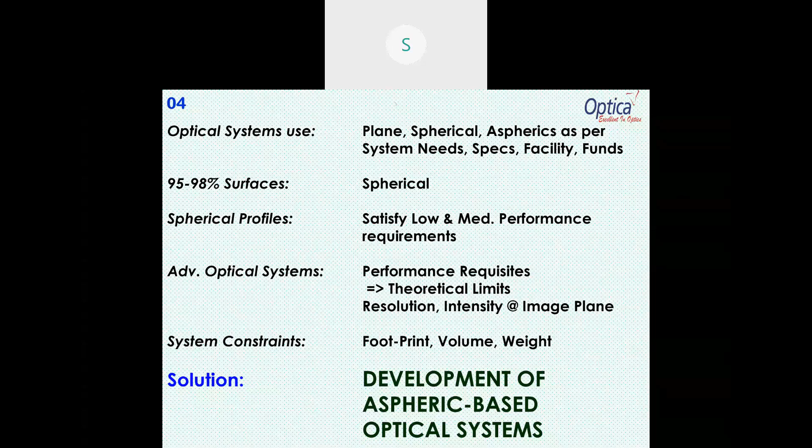So we were talking about advanced optical systems where the system needs to be compact, have less weight, occupy less footprint, and give better performance under different or difficult conditions. Then we mentioned we need to go for non-spherical surface, which is aspheric surface based optical systems.

Now, what is an aspheric system? The answer is very simple: any surface which is not spherical is aspheric. I already mentioned what is a spherical surface - it's one where the radius of curvature is the same whichever point you pick up on the aperture. When I say aspheric, that means the surface is not spherical.

So what it could be? Well, let us explore. Go to the next slide, please, Suresh.

When I say non-spherical surface, it could have any shape, but for the sake of simplicity, you cannot go to the top step of a ladder straight away - you start from the first step. So similarly, we start from rotationally symmetric surfaces. If you remember your 9th, 10th, 11th class, we studied conics - parabola, hyperbola, ellipse, etc. I'm referring to them. They are rotationally symmetric. The first class of aspheric surfaces are called rotationally symmetric conics. In this presentation we will be talking about them only, maybe at a future date we will talk about advanced surfaces also.

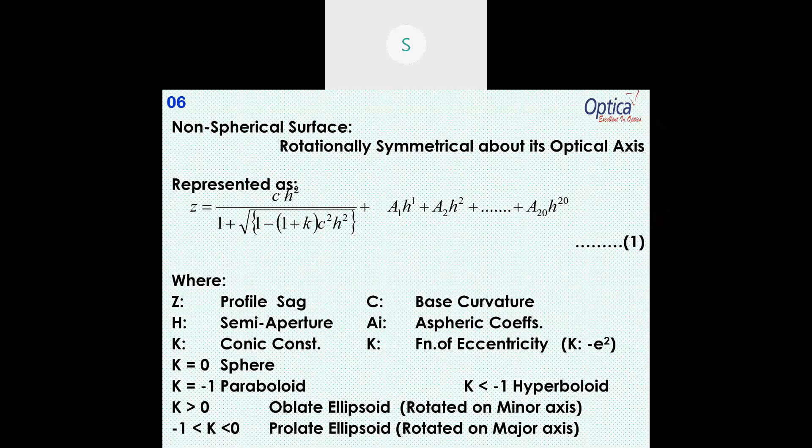Okay, can we go to the next slide, please?

Why do we need an asphere? I mentioned earlier that system performance needs to be near theoretical, meaning there should be no light loss, no energy loss. Optics people may remember the term aberration from their studies. Aberration is a defect where light incident on a surface, whether refracted through media or reflected, undergoes a transformation resulting in some loss of light or energy. Why does this happen?

The reason is simple: the basic nature of the curvature of the surface causes this. Different lens apertures focus light at different points rather than a single point. If you look at the optical axis, there's a junction where 5-6 lines cross over, so instead of focusing at one point, there's a sweeping of 5-6 points. The intensity is distributed over a limited area rather than a single point, and this distribution causes a loss of energy. We have to minimize this, though we cannot eliminate it completely - the distribution cannot be zero.

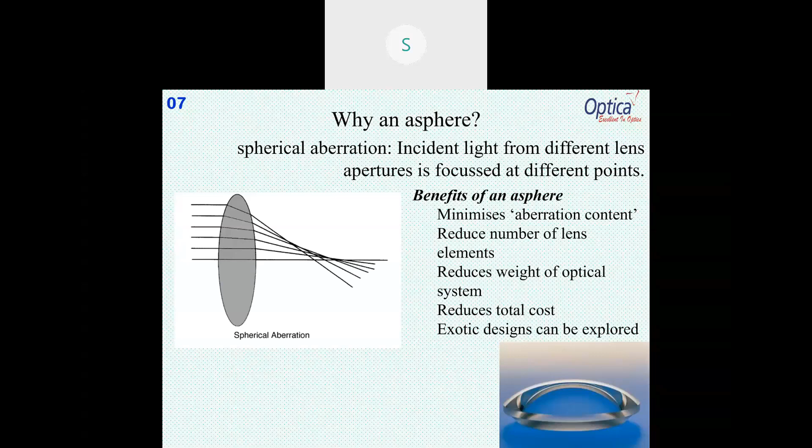So to minimize this, what do we need to do? We have to play with the shape of the surface. That playing of the shape, from a spherical surface to a non-spherical surface, is the whole game we are going to play in the next few minutes.

Now, why aspheric? I'm repeating this to reinforce the concept. Each curved surface and refractive index contribute to these aberrations, these defects of the light. To get rid of that, you play with the refractive index of the media, and if you can also play with the shape of the surface, then you can control the aberrations. That's what we are going to do.

People working in fiber optics know the term graded index - differential refractive index is called graded index, or GRIN. Some people work in that area, but I never got an opportunity to work on it, so I prefer to work in the reshaping of the optical surface, which is what I'm now explaining. This reshaping is called spherical to aspheric.

Why has this kind of reshaping suddenly taken place when it never happened before? If you look at the history of optics, the first recorded document appeared around the 10th century, and from then to today we are in the 21st century. For all these 11 centuries, people did not talk about aspherics. Why are we suddenly talking about aspherics now? Actually, we are not suddenly talking about it.

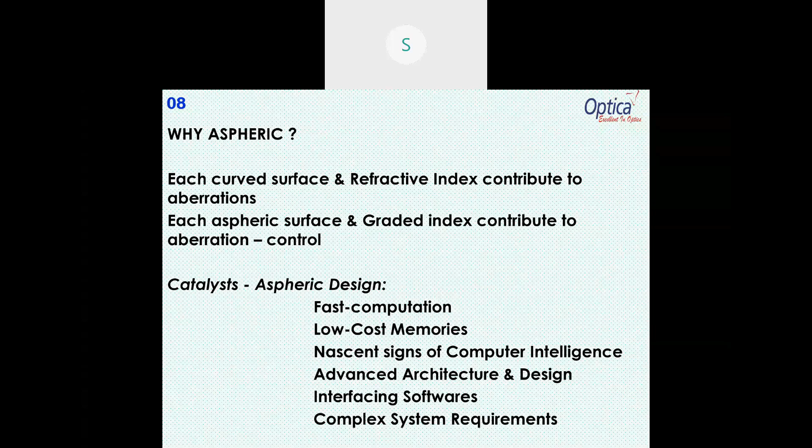Can we go to the next slide, please?

When I say advantages - number one, the designer gets additional degrees of freedom. Earlier he had only few parameters: radius of curvature, whether concave or convex, what radius - deep curvature, shallow curvature, or flat surface. He had few options besides the diameter of the lens, which tells you how much field he can cover and how much light he can gather. For a telescope, you want a larger diameter to capture light from a star many light years away. Similarly, deep or shallow surface - that's just two parameters. For a lens, the third parameter is refractive index.

By playing with the refractive index, you can bend the rays. Refractive index is the ratio of light speed in vacuum, or ether, to that in the media. When light passes through the media, it bends, and this bending can be controlled by picking a different refractive index. So there were only three parameters. Now, by reshaping the surface, you get additional degrees of freedom - that is the biggest advantage.

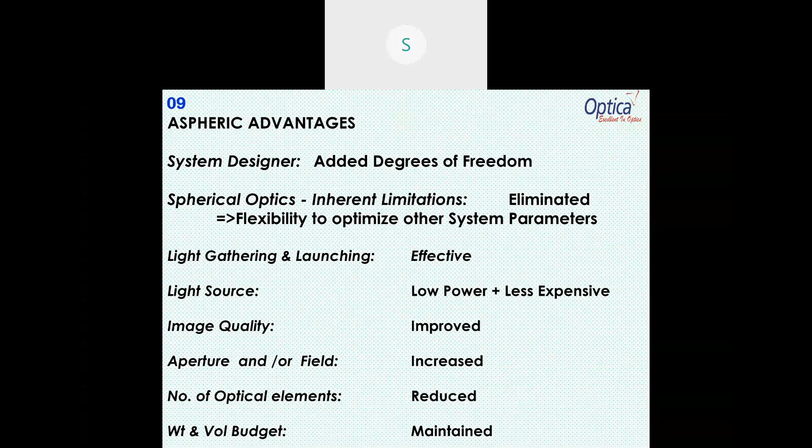So this is what happens by using a non-spherical surface - a reshaped surface giving extra degrees of freedom to the designer. If the fabricator can develop the same surface with minimal variation between what the design sheet says and the actual measurement, then the integrity of the prescription is maintained and the surface performs as intended. Now let's look at where and in what application domains aspheric surfaces are going to be used.

So can we go to the next slide, please?

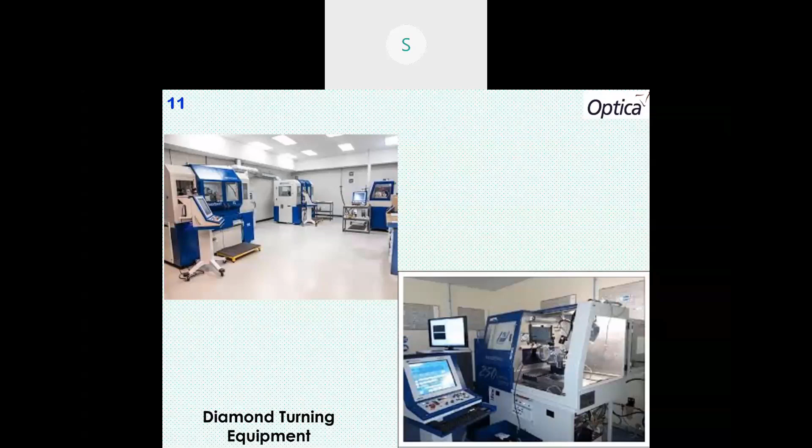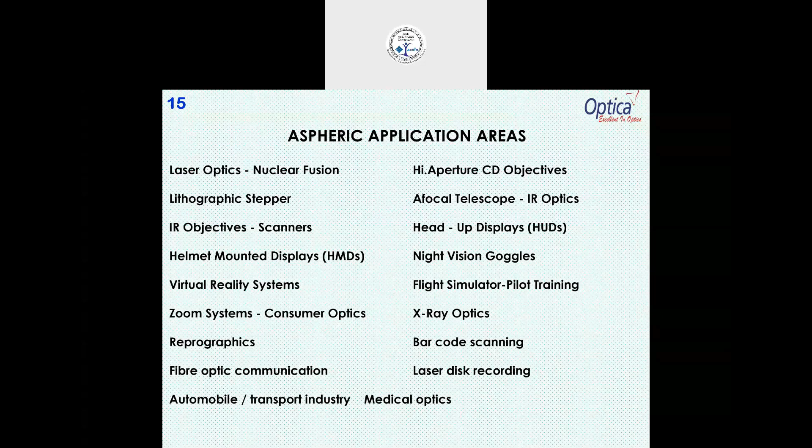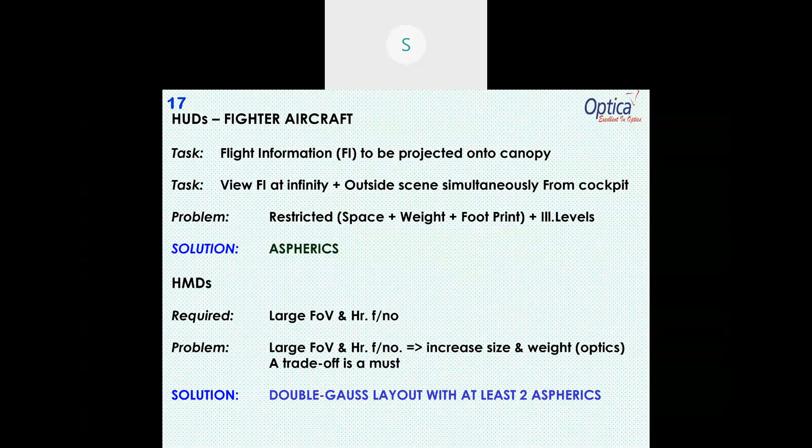This is a head-up display system, maybe a very preliminary system developed by CSIO. This was developed in 2002 or 2003, I think.

I don't exactly remember—maybe Dr. Vinod's group should be able to tell this, maybe you can interact with him. Okay, now what we are seeing here is helmet mounted display systems. I think CSIO has started working on them.

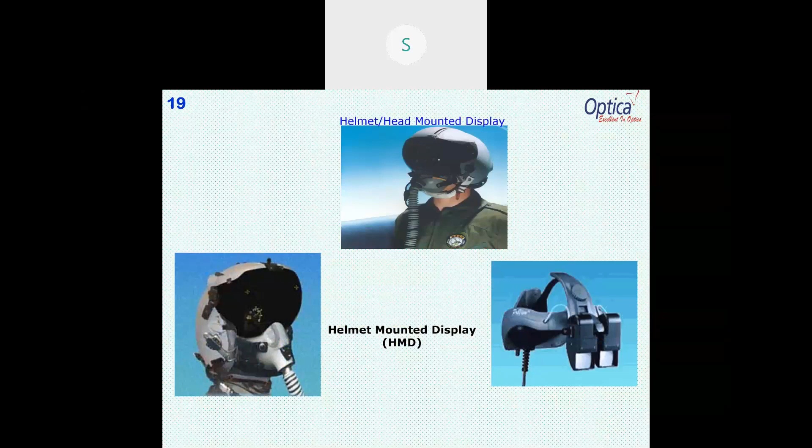One more, can you go faster? Better, more forward, yeah good. One more, binocular HMD. Yeah, now can you stop for a minute?

So many complicated things—some can be replaced by using an aspheric. That makes it lighter as well as easily compact, etc. So that's a simple example. Can we go to the next slide, please?

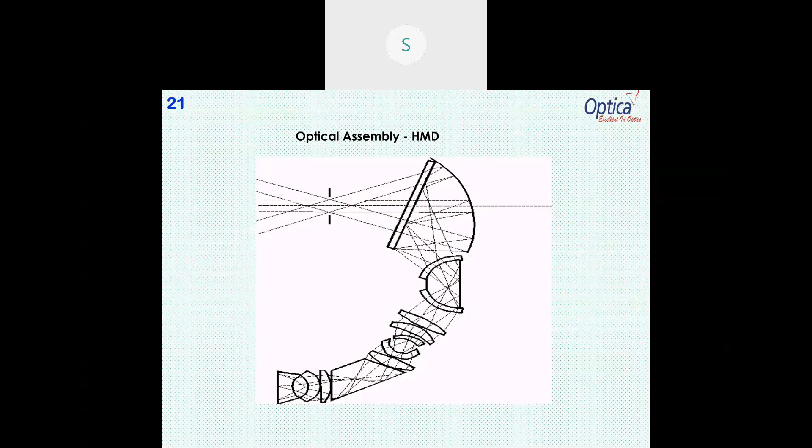This lens has both properties I mentioned for manipulating aberrations. Two ways: one is play with the shape, the second is play with the refractive index. Whosoever has created this, you call him a creator or God, has designed, developed, fabricated and assembled this aspheric lens in the human eye.

This lens is both a graded index media and also the surface is aspheric. And the asphericity is dynamic. As you zoom into a nearby object or zoom out of a far object, the shape of the surface changes. By changing the shape, your aberrations are controlled, and the power of the lens also changes, giving better focus for a far or nearby object.

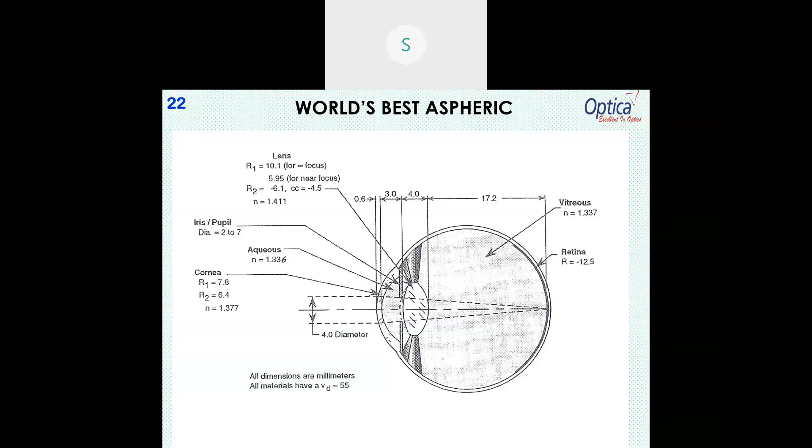When you put this implant in the body of a human being and he uses it as a joint—primarily these are all joints—these joints rub against each other. If they do not have the desired smoothness, or if their roughness is not adequately controlled, we will be into big trouble; the patient suffers pain. So it is necessary to make sure the roughness is reduced.

Now, how come I'm talking optics on one side and reduction of roughness on a medical implant on the other? The logic is very simple. If you remember a couple of slides back, I showed you diamond turning. Why did I show diamond turning? To show how to fabricate an aspheric surface. We are going to talk about that in the coming slides, so there you will appreciate this better.

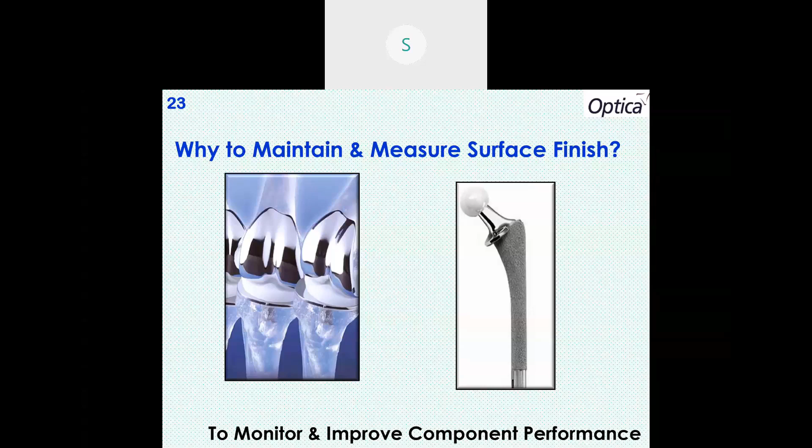Now I mentioned earlier, the first portion is design. You design first, and from the design, you go to the next stages. I already mentioned there are a few advantages.

Now, how do you decide, out of an optical system—let's say there are 20 surfaces, 20 or 10 lenses—how much you want to aspherize? Which particular surface has to be aspherized, and where do you want to do this? How do you choose that?

That's where the ingenuity, wisdom, or experience of the optical designer comes into play: how many aspheric surfaces, which particular surface, how much aspherization on a given surface, and how much aberration control is needed. Then you have to play with your tolerances, your fabrication, how you align them, how you test them, and what facilities you have at your disposal. Depending on your resources, it's like how much money you have in your wallet or credit card—depending on that, you spend.

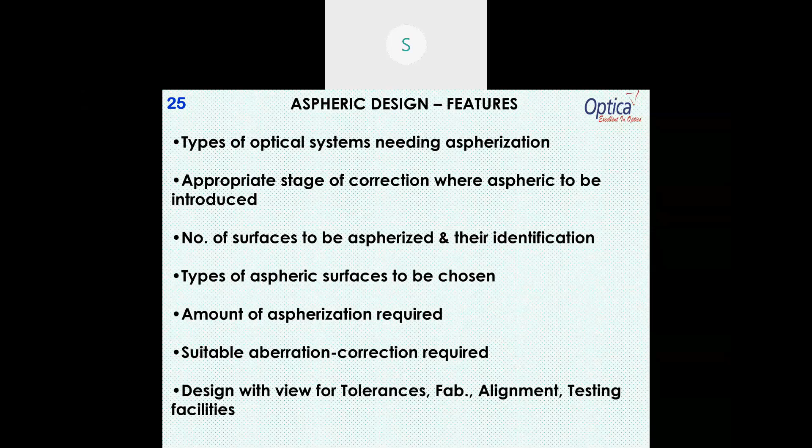Similarly, the facilities that you have would help you decide the amount of aspherization that an optical system can get. So this is primarily a policy-making area, a policy-making stage: how many, how much, and where, etc.

Once you have decided on the amount of aspherization you are going to introduce, how do you do that? Aspherization means reshaping the optical surface through material removal. In a typical optical workshop, like at CSIO, you see grinding and polishing. You can use abrasive grinding, or vacuum aspherization where you remove or deposit material through additive manufacturing, ion machining, or ion deposition. You can also deform the surface, or use compressive molding. There are many methods, but diamond turning is what we are really going to talk about in the next 10-15 minutes.

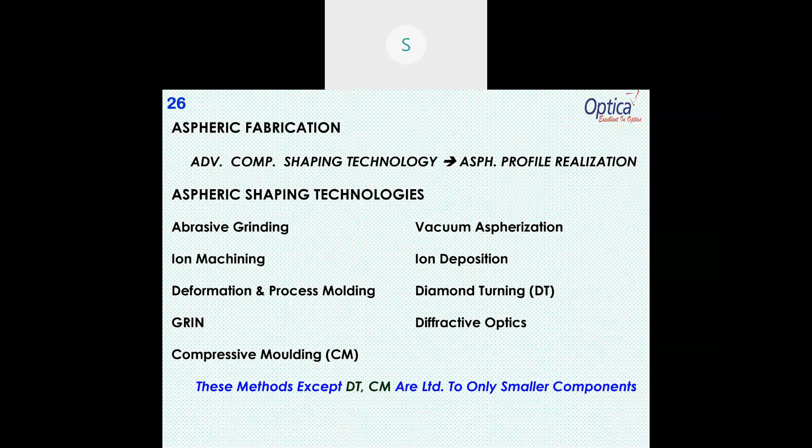What is diamond turning? Before that, how is an optical surface made conventionally? Let's go to the next slide, number 28.

How is an optical surface made in a conventional method? Let's talk of a lens. You take a glass blank, rough shape it using a tool, and leave a stock of about 1 millimeter extra, or maybe 0.5 depending on the skills of your workshop people. Then you generate the optical shape - the radius of curvature, whether positive or negative, convex or concave, and the thickness.

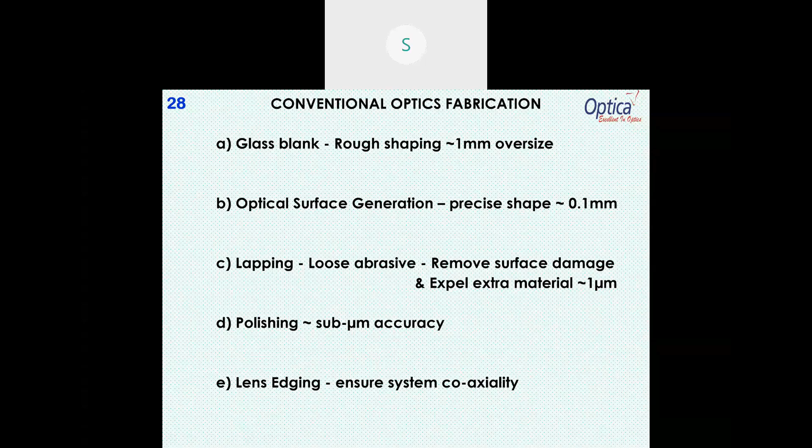Let's go back to slide 27. In the previous slide, number 28, I was talking about who does all this - a person or a machine, primarily the process. Now, how do you ensure the process is error-free? That's where CCOM, computer controlled optical manufacturing technology, comes into play. You control the grinding, the polishing, and build in a feedback mechanism so the curvature is maintained, the aperture is maintained, and the surface quality is also maintained.

The basic problem in aspheric surface generation is the difference between aspheric and spherical surfaces. The radius of curvature is continuously changing from the vertex, point by point, all the way to the edge of the surface. This means you have to create a surface where the radius is constantly changing. How can you depend on human skill here? Is there any mechanism to develop this kind of surface? No tools are available - the normal traditional tools are all spherical tools, so traditional optical workshop techniques do not serve the purpose here.

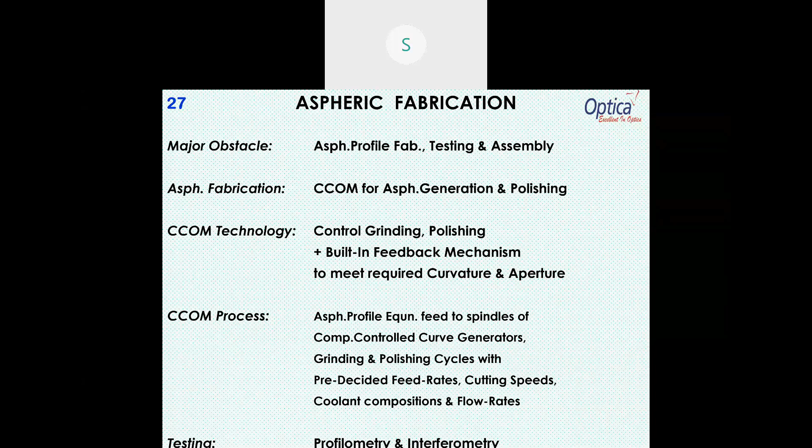So we are talking of a diamond turning machine. What is a diamond turning machine? It is a perfect machine, tool, and job or workpiece combination. The machine has ultra high precision controller accuracy. The tool is a diamond tool, that's why we call it diamond turning - the tool is practically a diamond tip. The workpiece is the optical surface we are going to generate. When these three work in unison, and when you control the process, the operational conditions, and the machining conditions with proper feedback mechanism, you generate the optical surface of the highest quality.

Somebody asked me a long time back when I was at CSIO - you are using a CNC lathe machine and you say this is an optical instrument, how is that possible? The answer is simple: I'm using an ultra high precision mechanical equipment to generate an optical quality surface. When I say optical quality, the surface waviness - mechanical engineering people understand this as waviness, physics people call it figure error.

In optics, we measure everything in terms of wavelength. The visible wavelength range is 0.4 to 0.7. So when I say wavelength, the fraction of a wavelength is my error. We'll come to that a little later.

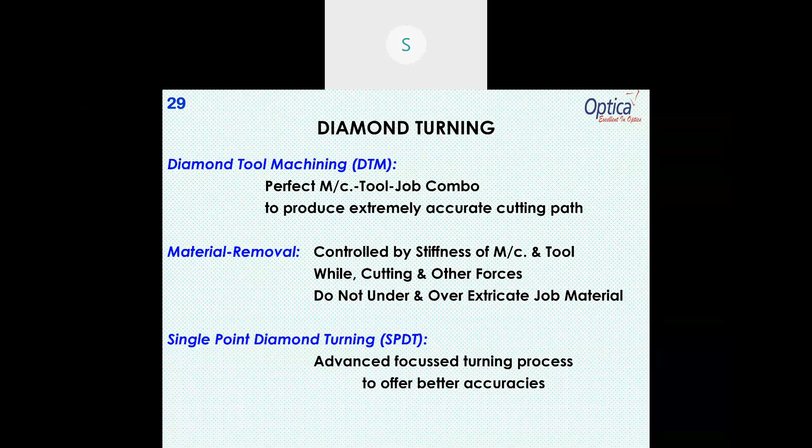Okay, how do you do this? There are stages. You prepare the job to approximately 100 microns or 0.1 millimeter and mount it on a vacuum chuck as I mentioned. Then you select a proper tool - like a painter selects a proper brush with the right geometry and shape - you select the tool with the right geometry and determine how to mount it. Then TPG means tool path generation - you have to generate a proper tool path. It's like going from CSIO to Sector 17 or Elante Mall - you have a path, you have to chalk the path, and if you're asking your machine to take you there, you have to give this path to your machine.

Similarly, how the machine is going to generate this surface, you have to specify how the tool is traveling on your job. That is called tool path generation. Then diamond turning takes place, the machining takes place. Then you take the metal component out, clean it up, verify. In other words, you check the surface for the prescription, whether the radii are okay, whether the K number is properly done, the figure error, and how is the roughness. So these are the stages.

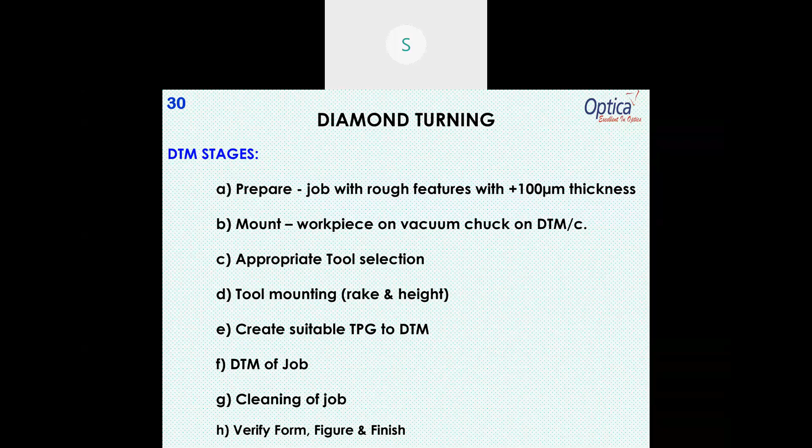We'll go a little faster from here. I'll not get into many details.

So this is how we generate an aspheric surface. Diamond turning is primarily a displacement controlled process, so this force is distributed at one point, whereas in grinding process, force is equally distributed over a large domain, a large area. There you actually fracture the top layer of the surface, and you apply pressure, creating a network of cracks, and repeated application of pressure force removes the top layer material. Here, line by line, you are actually walking, or taking a pen on paper, or taking a stylus on the surface. You are taking the tool, removing the material by shearing it. So this is force distribution over a small area.

And how do you do that? There are 3-4 parameters in our hand. One is the feed, another is the speed, that is the spindle speed, and the depth of cut. One point we forgot to add is the material. The motion of the tool depends on the material on which it is actually working. Simple example: if I ask you to walk on a highway, or on a cobbled street, or on a place where there is no road, your path is disturbed, your way of walking will be disturbed. Similarly, the tool's geometry as well as the material being machined or processed would decide the surface quality that comes at the end.

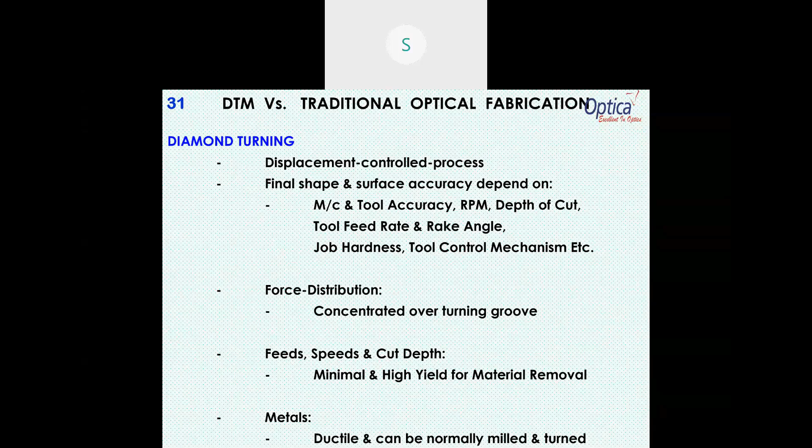We mentioned about the grinding process, the network of fractures, etc. I think we can skip this and go to the next one.

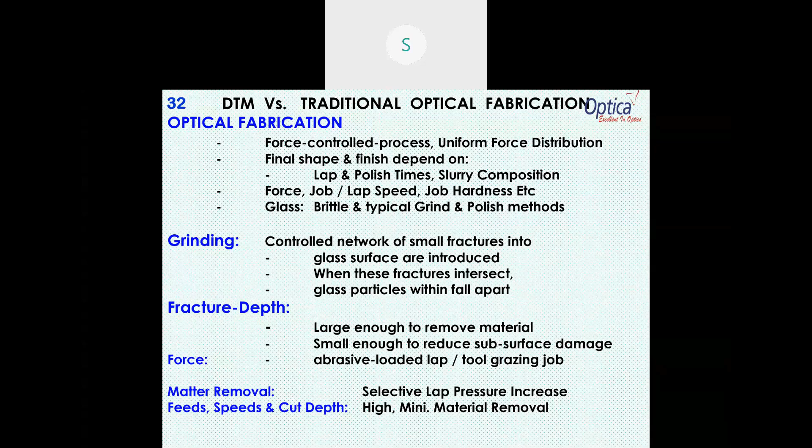Now I was mentioning about how we test the surface, whether it is meeting the required specifications or not. What we do is actually we measure the inaccuracy, we don't measure the accuracy. In normal conventional optical fabrication, you use a test plate, Newton rings, and an interferometer. For the roughness, you have the concept of how many scratches are there, what is the depth and width of the scratch, the scratch and dig concept.

Whereas in diamond turning, the profile accuracy, or inaccuracy, is measured using a profilometer, a scanner which goes over the surface, scans it, and measures the depth of the surface, which we call the sag or size, and it measures the waviness of the surface. Surface finish is also done by the same scan. You have to write the program. If you remember the equation I was talking about, the same equation is used by the designer to design the surface. We feed the same equation to the fabricator or diamond turning person through CNC programming to generate the surface. And here also, we use the same equation to test whether the surface is made as desired or not.

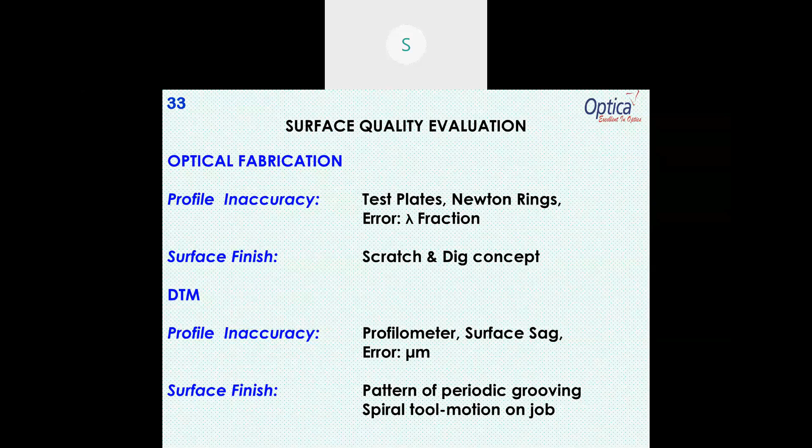Okay. As I mentioned, there are many methods of generating this kind of surface. Why is diamond turning selected? Because diamond turning is the most preferred method. The lathe machine or CNC machine, the machining, is one issue - it has to be ultra high precision. As I mentioned, we are talking of controller accuracy of a few nanometers, 8 to 9 nanometers, and we are talking of a tool which is hard yet very sharp with minimal tool wear. These issues are very important. If the tool wear is high, it's like a chalk piece which, during writing on the board, erodes and wears off - before you finish a sentence, you have to change your chalk. I'm talking of old days. So similarly, you have to be very sure of the wear of the tool that you are using.

That's the reason why diamond has been selected, because diamond is the hardest material available to mankind. So diamond has been selected as a tool, and an ultra high precision lathe is selected for machining. Instead of normal CNC machines or any other material removal methods, diamond turning is selected to generate a surface which is aspheric of optical quality. When I say optical quality, the waviness or the peak to valley errors are a fraction of optical wavelength. And optical wavelength, mind you, we are talking of 0.4 micron to 0.7 micron, the visible range. That is the reason why we go for diamond turning.

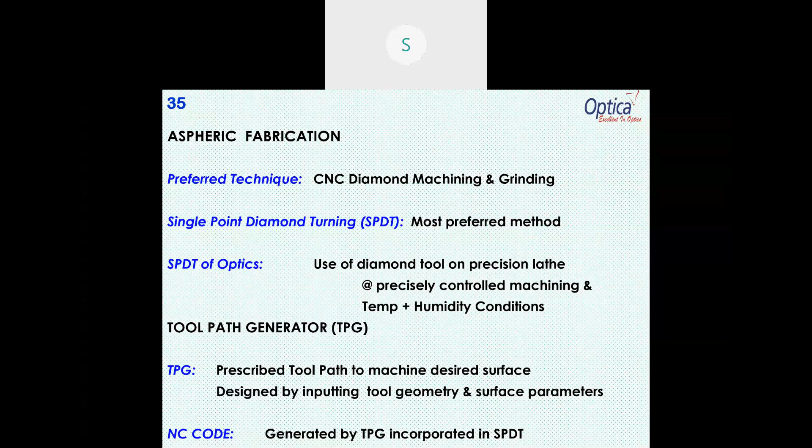I was mentioning about machining conditions. Needless to say, the machine has to be stable - no vibrations, no shocks, also no thermal shocks. Why we should not have thermal shocks: most of the machine is metal. Coefficient of linear expansion of any metal varies between 7 micron to 14 micron per meter per degree centigrade. And the machine bed is generally about 250 mm, that is 1/4 of a meter. So if there is a 1 degree centigrade change in the temperature around the system, you are actually causing, say, 1.75 microns to 3.5 microns error in the movement of the metal slide.

Just think about it. The movement itself is error - there is an error of, let us say, 1.75 micron. Then what will happen to the surface that is being processed? Because I was mentioning 0.4 to 0.7 is my wavelength, and the surface quality needs to be a fraction of that wavelength, that is, we are talking about, let's say, 0.15 micron. How can I afford to have thermal conditions affect my surface? That's the reason why we say the ambient temperature has to be maintained within plus or minus a tight range. Relative humidity is also controlled. Cleanliness should also be high, and the machine has to be really good.

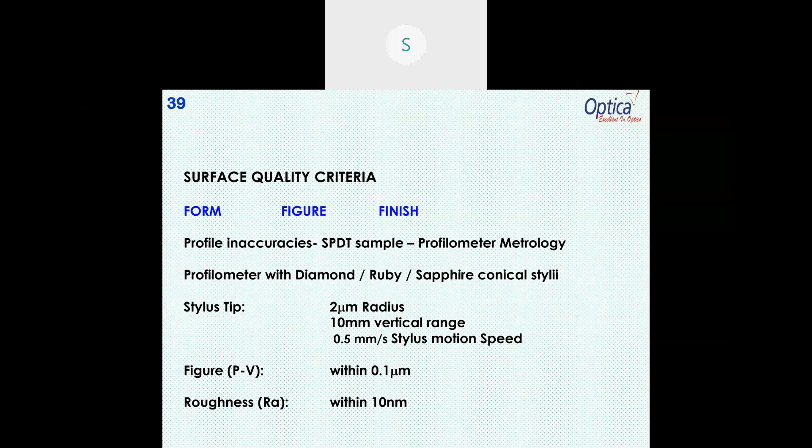No, these are the ideal conditions. So far I have talked about that. Now let's talk about what are the problems in developing an aspheric surface using diamond turning. There are many issues, we'll go one by one. We'll take within 10-15 minutes.

Another 5-10 minutes rather. So we know that aspheric fabrication using diamond turning is a vibration-free diamond tool machining. Material removal is minimal, consistent surface quality, surface characterization - all these things are welcome. They look pretty good when you hear these things, but in reality, what will happen?

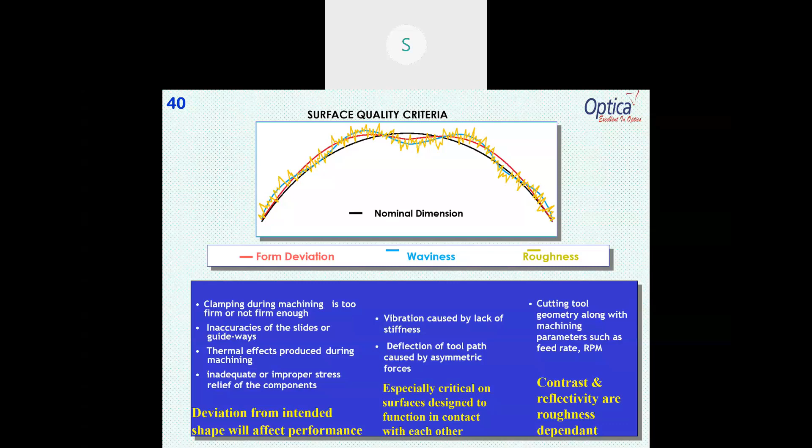What are the errors? Somewhere we come across issues. Now, these are the issues.

The machine is in perpetual motion, the spindle rotating at 3,000 or 4,000 revolutions per minute. So there are dynamic effects taking place. Maybe loading is not okay, or the machine job is not properly put, or the balance of the machine is not okay, or maybe there is some resonance in the machine. All these things will contribute to errors in form, figure, and finish. That's what we have to worry about.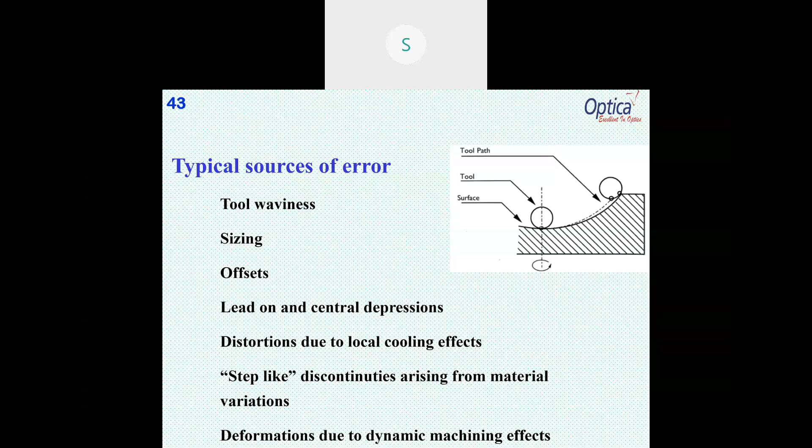What will happen when these things happen? All those things I mentioned - your tool has worn out, dynamic machining issues, thermal effects - all of these are causing issues. What will happen? Let's see.

Then tolerances are violated. The surface figure and roughness tolerance are violated. So when one particular surface gets spoiled, when it violates this prescription, the errors will contribute to the overall performance.

Something like this: let's say you have a class of 10 students in class 10. One fellow has failed, so the overall percentage comes down. Everybody is scoring 90, 95, but this one is like me, scoring only 42, 43. Just because of this one student, the whole percentage comes down. Similarly, one surface, because of its errors during fabrication, will spoil the performance of the whole optical system.

So they contribute when the design goals fail. Just imagine a soldier using your night vision system - his life depends on the fabrication and design of what he is carrying. If one surface is not made properly, instead of shooting an enemy, he may shoot our own soldier. These things will happen.

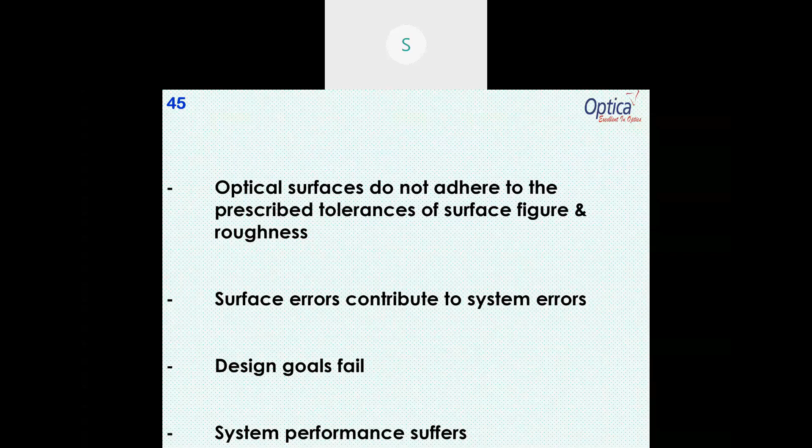How to resolve these issues? Very simple - you have to play with the parameters. I want to share that I'm not an engineer, I was not trained as an engineer. I'm a science man - MSc Physics was my introduction, then I did my MTech in optics, and then PhD, that too in design, not fabrication. But this fascinated me - diamond turning fascinated me when I went to USA on the Indo-US Science and Technology Fellowship. There we went through this and learned.

Now this flowchart shows how to resolve the errors. You start with the machine, prepare a component, measure the surface, check whether it is okay or not. If it is not okay, then you change your tool path, the way your tool is moving, and then go back. This error correction cycle takes place.

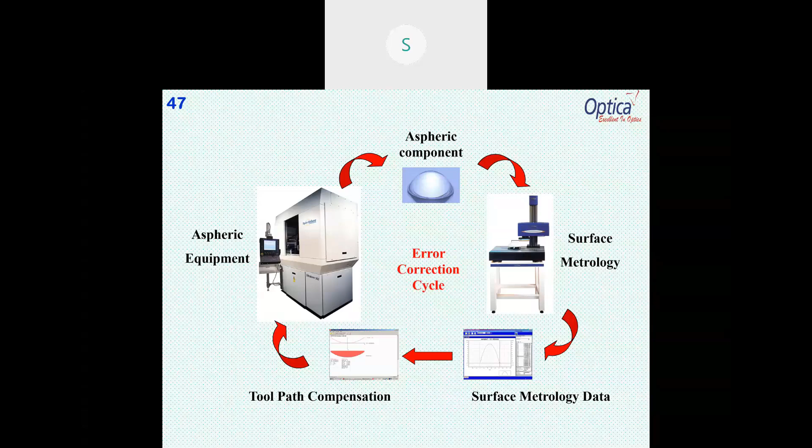So how do we proceed? If it is so simple, then what are the challenges? Let's go through this a little faster - I think I am overshooting the time. This portion is about deterministic precision machining. When I say deterministic, what is deterministic?

Deterministic system means randomness is minimized. A deterministic model will always give you the same output from a given starting condition. It is like this: if you start from sector 3 and need to go to sector 17, under normal conditions it will take 20 minutes. So under the same conditions, you should always take only 20 minutes. If you take 25 minutes or 14 minutes, that means the processing of this data is not properly learned - the system is not deterministic. Deterministic means randomness is reduced, and that's what we apply in diamond turning.

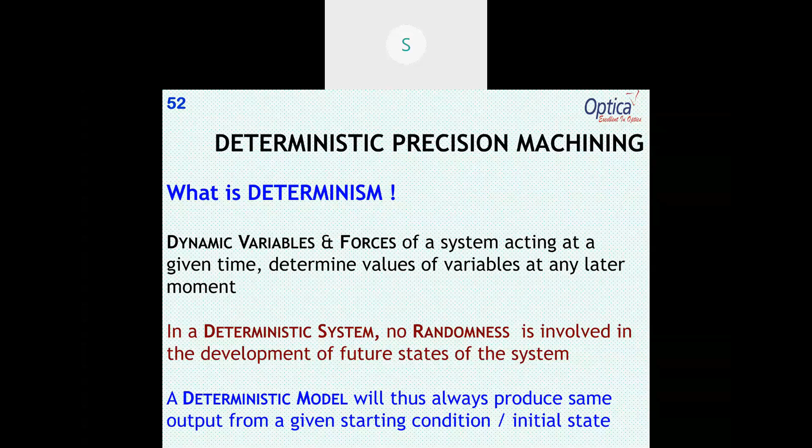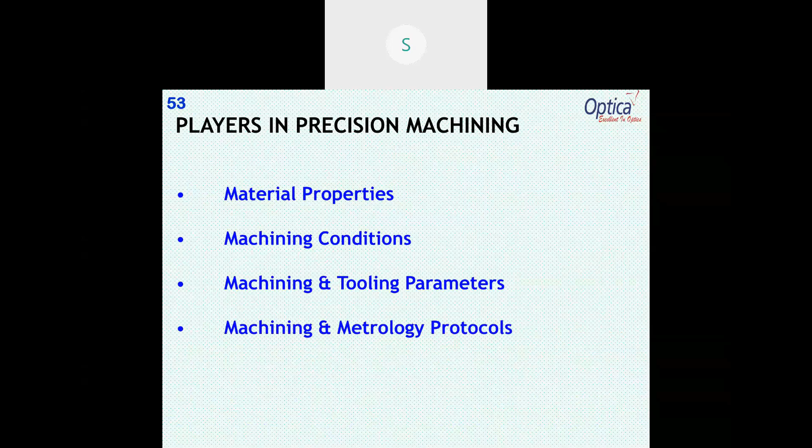What are the parameters which create randomness? There are four: material, machining condition, machining and tooling parameters, and machining and metrology protocols. These are the sources of violations, or sources of not being able to meet the end results. Can we go faster?

Yeah, material. First thing is material. These are the parameters: hardness, ductility, brittleness, thermal property, whether it is crystalline, amorphous, etc. These will decide its behavior. But material is also not decided by you, the machinist, but by the designer.

He decides, I need this particular material for these reasons. Whether it's normal aluminum needed, or super fine aluminum needed, or copper, or maybe he wanted a brass material. This is designed by him, not by you. Similarly, if he wanted to go for an IR component, should I use germanium, or silicon, or some other material? This is as per the prescription.

It is something like this. You have a brother who is an intelligent fellow, and you have another brother like me who is a useless fellow. Now, the intelligent fellow will anyway score marks. The question is, how do you make a useless fellow score more marks? That's where your skills come into play, or you have to manage the intelligence in such a way that the targets are achieved.

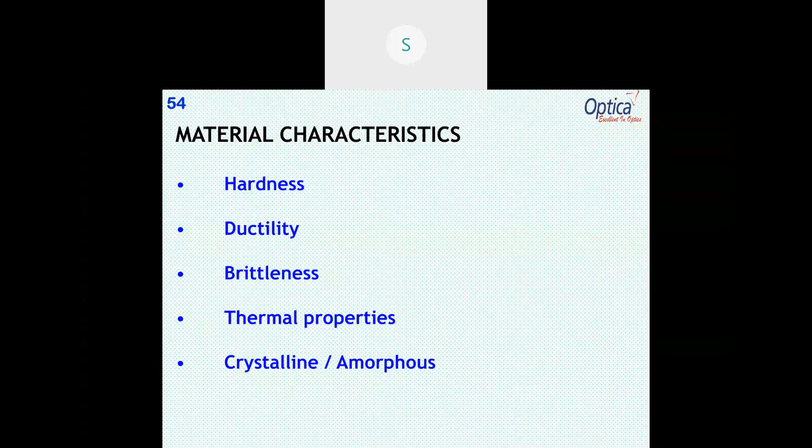Next one please. Machining conditions. How do you control them? What are the parameters? The coolant is used.

Whether the coolant is properly selected or not, properly placed or not, whether the coolant is actually cooling the job or not, or it's cooling somewhere else. It should not be hitting one place while aiming at another. It should be exactly where it should be.

Next one is temperature. The ambient temperature is fluctuating. So obviously, you remember I was talking of thermal coefficient of linear expansion. Those things should not come in.

Similarly, the chips are coming in during machining. The chips are either properly thrown out or coming in between the tool and the job. And similarly, what is the humidity? And what about the tool wear? If the tool is worn out during machining, obviously you don't get the surface quality as you want.

Similarly, the last one, what is the type of programming? What is the way that the tool is moving? So this also causes effects. Next one please.

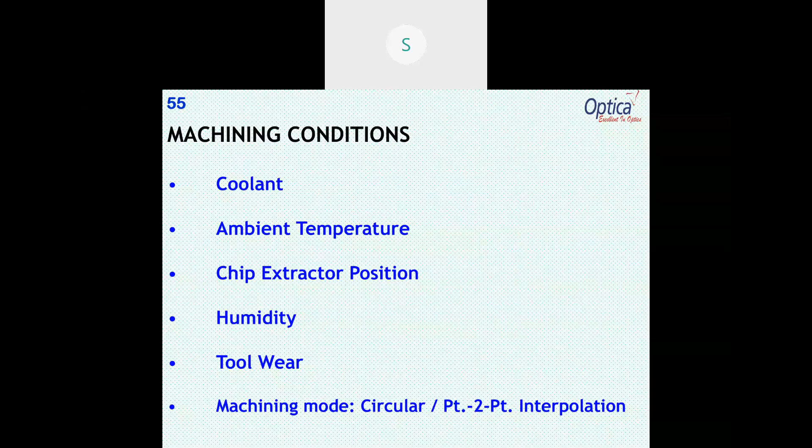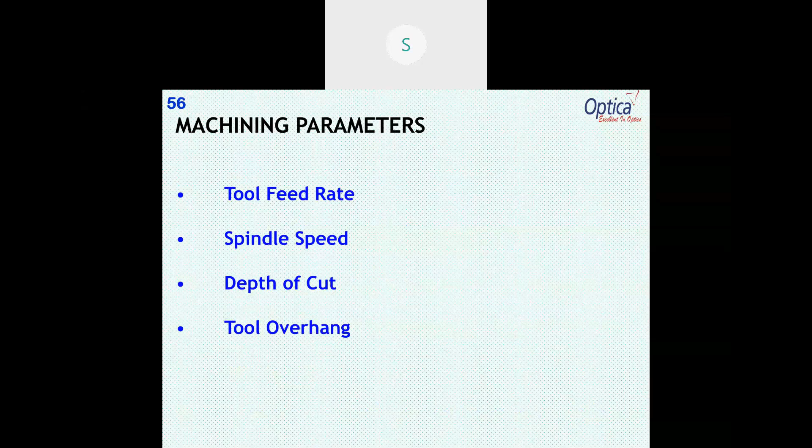Then machining parameters also. I mentioned there are major parameters: tool feed rate, spindle speed, depth of cut, and then tool overhang. All these 4 parameters. Tool overhang is how the tool is being held, far or near. So these, I think from here we'll go a little faster.

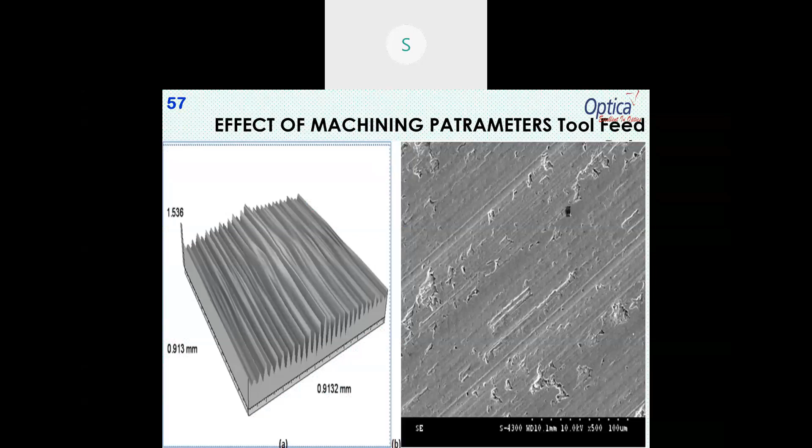The next parameter tells you about tool feed. What happens when you properly or improperly select a tool? Okay, then next one. Here is your placement of the job. You see the lines, whether it is properly done, or tool overhang, etc.

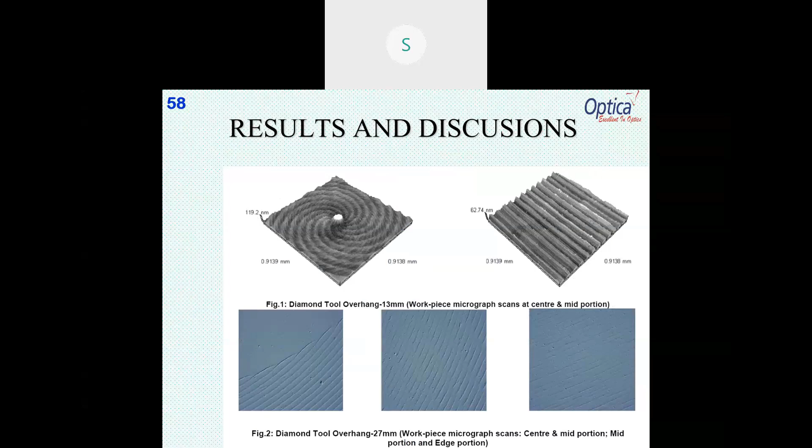Yeah, these studies, my dear friends, we have done all these studies. Whatever you are seeing are done at CSIO. So I owe all these slides to CSIO. All my colleagues there have done this, particularly Mr. Vinod Mishra.

So here you see the parameters: tool feed rate, depth of cut, spindle speed, and their effect on the surface quality in terms of roughness as well as in PT. RA corresponds to roughness, PT corresponds to the figure error. Next one please.

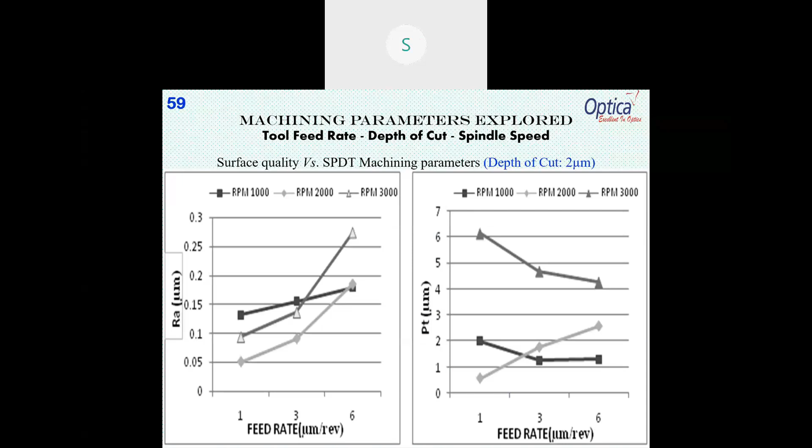Here we are playing with different depths of cut. Next one please. Yeah, it is the highest depth of cut. What will happen at the highest depth of cut? The surface quality becomes bad, poor.

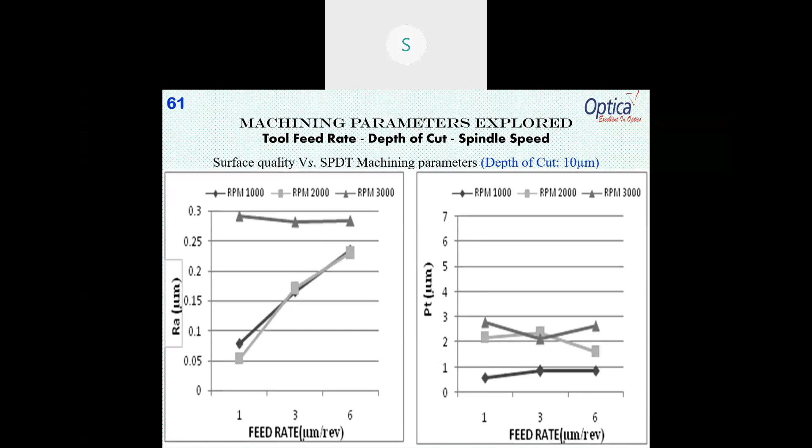So then, tool feed rate, how it is affecting. We have done all these studies on different materials at CSIO. You can go to the next slides a little faster.

Yes, the next one. You can actually see here, if the spindle speed is not properly selected, then we get something called a star picture. And then what you are seeing is the tool is not properly held. That is called tool overhang, if the tool is too closely held or too far away held, either way.

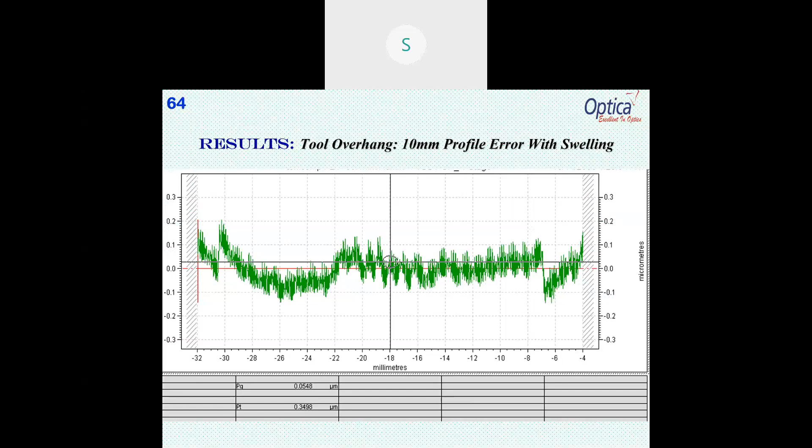Next one, you can see the effect of tool overhang on the surface quality in terms of waviness, as well as next one. Yeah, this is the roughness, if it is properly held or not. So these studies we have conducted.

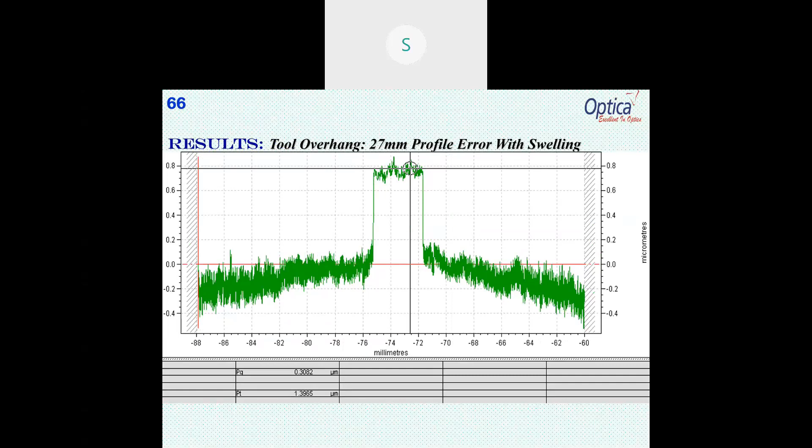Next one, here it is an improperly held tool, very bad holding of the tool. It's something like, how do you hold your pen while you are writing? Is it that you put the nib, that writing area, very close to your fingers or very far? That is what I mean by saying overhang.

Next one please. Yeah, this is for the roughness, tool overhang with the roughness. The next two slides. Next one please.

This slide represents work that took us nearly 3.5 months. We are showing different roughnesses under different tool feed rates, depths of cut, and spindle speeds. Which one, for a given tool overhang, is the best? How do you hold the tool? This study was part of a couple of MTech students' thesis.

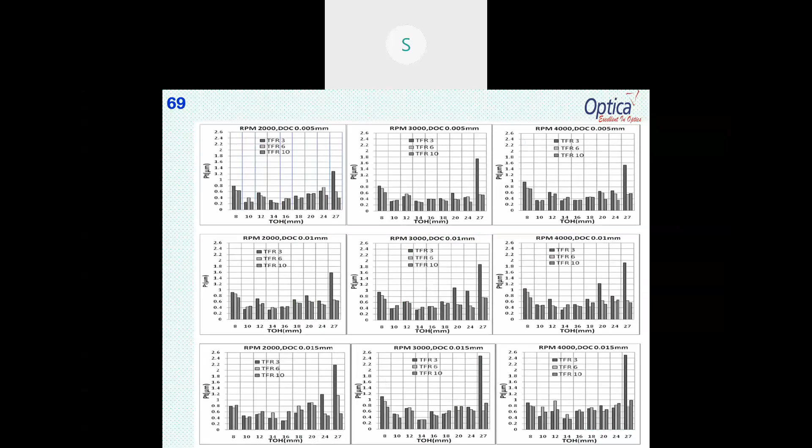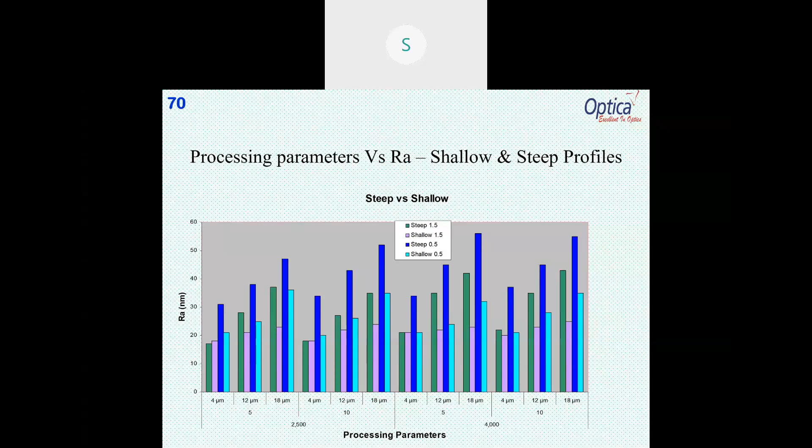We have done this study for both roughness and waviness, and also examined shallow versus steep surfaces to see what happens in terms of roughness. There are many such studies we conducted.

We also did an exhaustive study on diamond tool wear, taking two materials, silicon and polymethyl methacrylate, that is acrylic. Here is a typical tool, how it looks. On the right is a photograph taken by one of my students at CSIO, showing the octahedral structure of the diamond crystal.

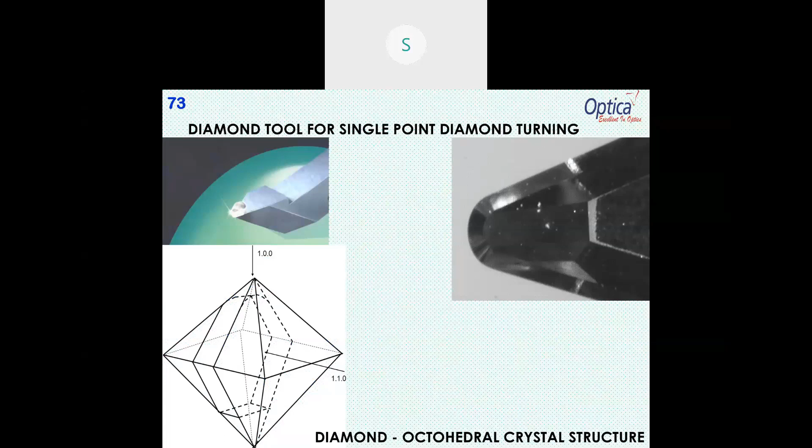These are the parameters important for selecting a proper tool geometry: rake angle, conical angle, nose radius, cutting arc, offset angle. If anyone is more interested, my contact details are provided, you are welcome to contact me. I won't get into details here since it's an exhaustive study we did on tool geometry effects, particularly tool wear.

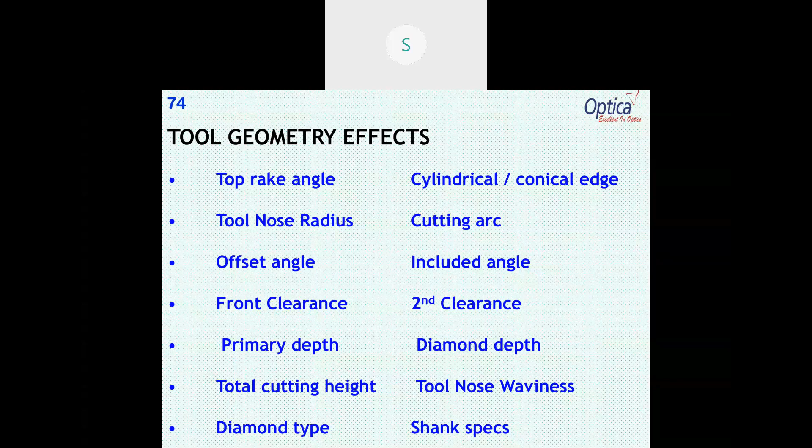As I mentioned, the edge is supposed to have ideal circularity, if that ever happens. When there is a violation or transgression, controlled versus uncontrolled waviness results, and the surface suffers as shown here.

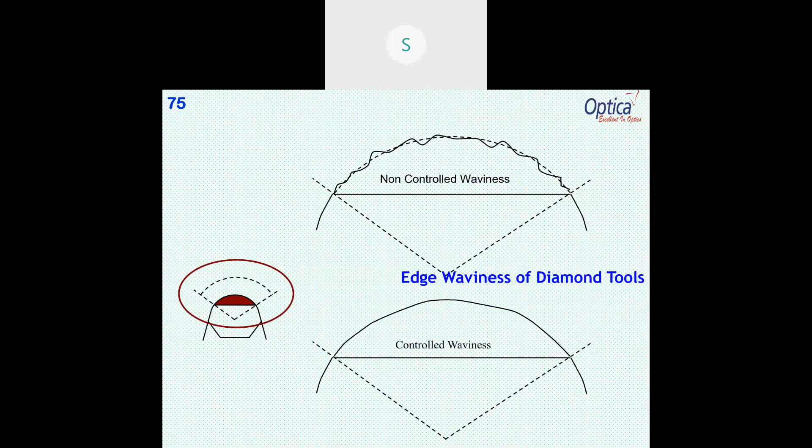Apart from that, if the tool is worn out more than it should be, what happens? The inlaid photograph and schematic show this, because practically the tool tip replicates onto the job. If the tool tip is not okay, the job will also not be okay.

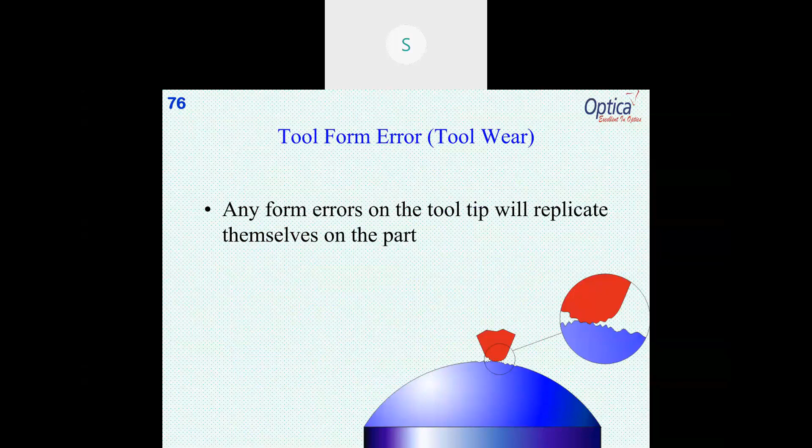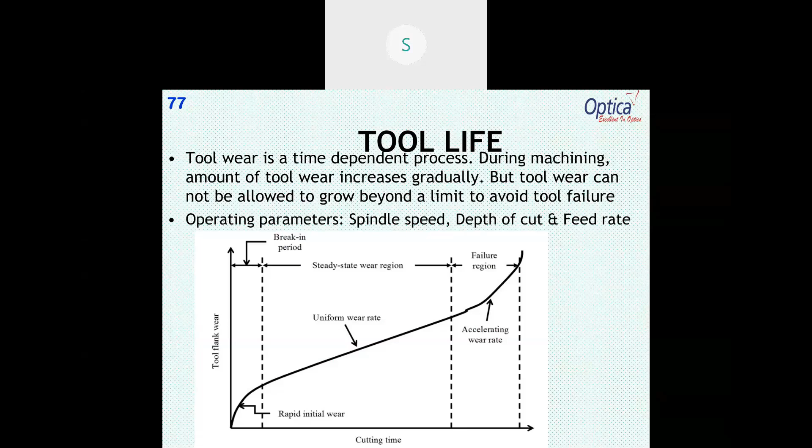Why do we measure tool wear through metrology? It's very important because these tools are very expensive. A normal CNC lathe tool may cost 50 to 150 rupees, at most 1500 rupees, whereas a diamond tool starts from 20,000 rupees and goes up to 1.4 lakhs for just one tool. When the tool wears out, I have to change it, which means more money, making the component very expensive. To control tooling costs, we need to study the wear characteristics.

In diamond tool metrology, before CSIO attempted this, nobody had done it. We reviewed a lot of literature; the way it was understood was different. We approached it in a radically different way.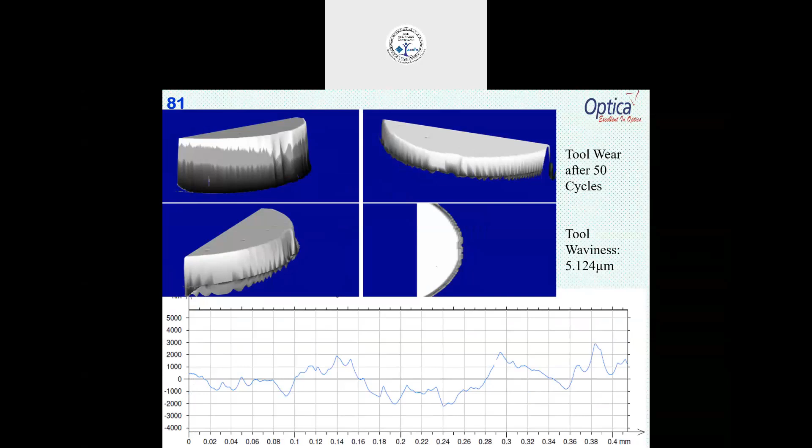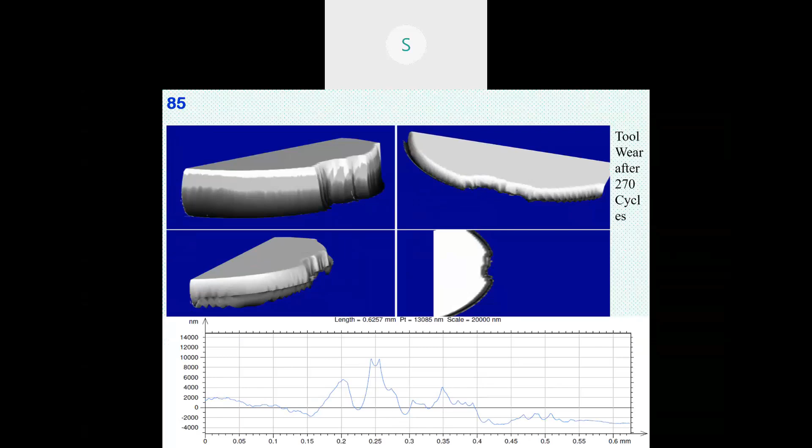We conducted typical machining cycles starting from 50, 100, 150, with different materials each time. Each cycle shows, through photographs, how much D-shaping of the tool occurred, up to 270 cycles. This study was again done by a couple of MTech students over 4 to 5 months, day in and day out, across different materials. We took pictures of the tool and carried out very critical design of experiments, conducting a lot of studies there.

So what you see here is just the replication of normal tool wear as is for the standard textbooks. Now you can say, what new have you done here? We have done all this with a diamond tool, which was never reported before. So we got a few publications based on this study also.

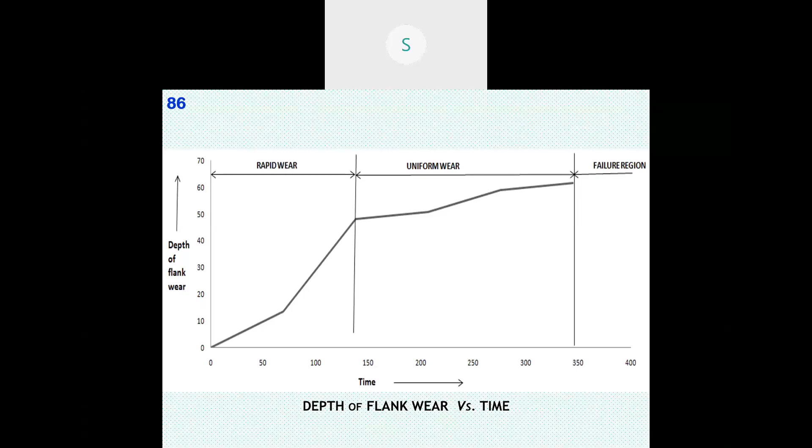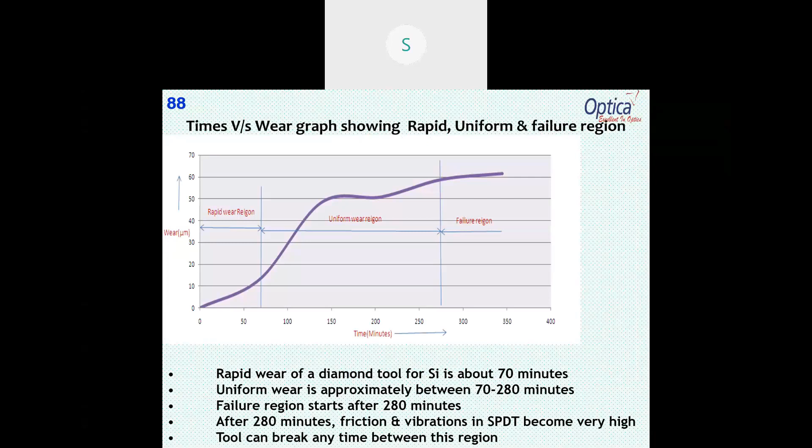Can we go a little faster now? Next, yeah, this is again on a different wear we are talking about. Yes, we have analyzed this in terms of the normal tools also.

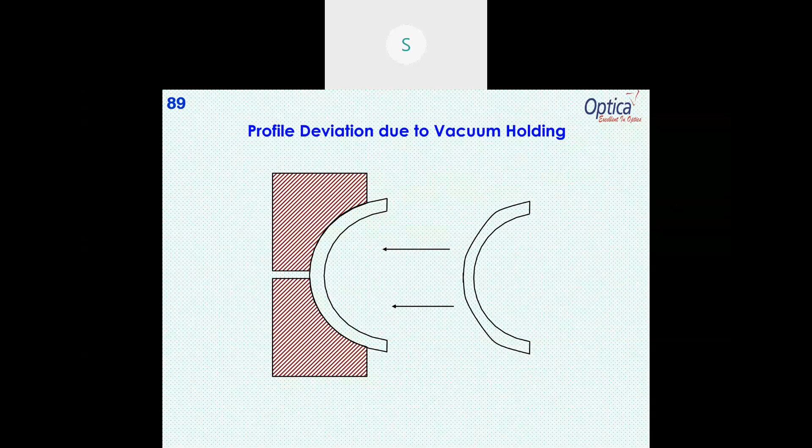So here we are talking of a different thing. If you remember, I've told you how to hold the job. If you hold the job tight or loose, what would happen? You actually are bending the job. You bend the job, whether the hysteresis properties will allow the job to come back to its original shape, it will spring back or not. If some error is left behind, that means you have damaged the component. So the holding of the job is very important. One of my students at CSIO has done some work on this particular aspect. And these 3-4 slides, next one please.

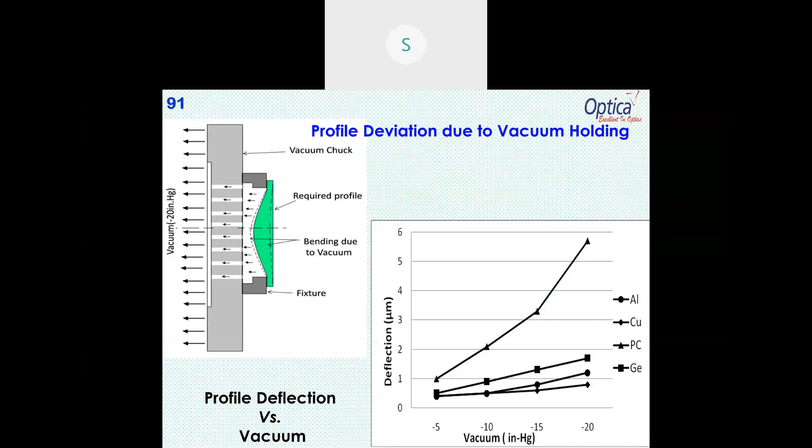Yeah, we have done this. Four of my students have worked on how the thermal effects during diamond turning would affect the profile error in diamond turning, spread over 3-4 years. Boys have done this at CSIO, MTech students, and again these AcSIR students. We have designed a series of experiments and a mathematical model has been created, and then we did all that. So what I want to share with you is that a lot of case studies have been conducted for different aspects of diamond turning using different materials.

And I have to accept, I have to submit here, most of the work, my dear friends, was done by you people or your predecessors, the students. My participation was giving an idea, follow up, design of the experiment. Actual work, actual running the show was done by my students, your predecessors at CSIR, CSIO. So all credit to them. I mean, my contribution is only idea, assimilation, analysis, and conclusion. Whereas the actual grunt work, as they say, cutting the grass, was all done by the students. So this is what we did there.

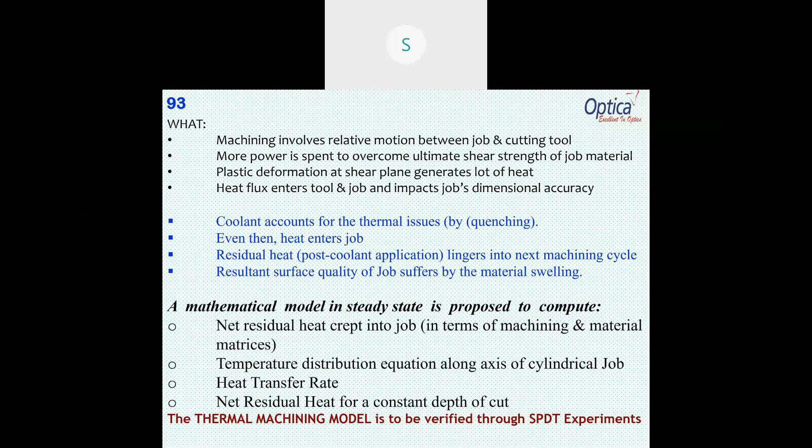Now let me go to the next one please. Yeah, here I'll just spend 2 minutes. Now after your AcSIR career, after the degree that you take, where are you going to go? You go to academics to teach, you go to industry, or you become scientists, or you go abroad, you do whatever you want. Whether you are going to work in the field of science and technology or you are going to become managers, I have no idea. Future will unveil everything in time.

And one thing above is opportunity utilization. See, COVID-19 is going to teach us many things. New business models are coming, new living styles are going to emerge. Now, whatever opportunity comes your way, grab it with both hands. How fast, how quick, how effectively.

Then all your resource management. It is one thing to have resources and another thing to manage them optimally. What is the manpower at the operational level as well as the intellectual level? You can't have everybody doing everything, right? How are you going to deal with the people? People with intellect, they come with egos also, complexities of behavior. How do you deal with that? Because end of the day, how much money you made, how many projects you have completed, these are the issues that will come into play.

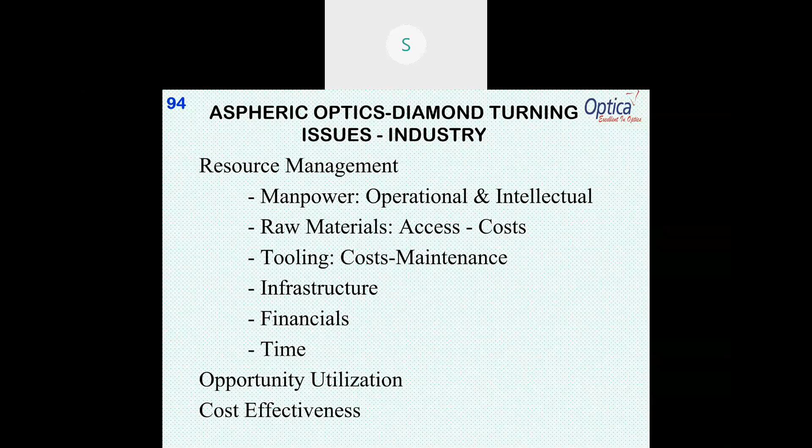It's very important. So, a couple of slides more and we're through. We need to develop micro machining models. All the work that I presented is based on fundamental principles leading to last conclusions - some mathematics, some modeling, some gut feelings, some assumptions, some literature survey, like that. And tool wear dynamics, materials, subsurface damage - one of my students at CSIO, Rohit Sharma, just completed his PhD and did extensive work on subsurface damage. And the heat - this is a very big issue in diamond turning of a component - and vibration analysis. So microfabrication and nano characterization require a lot of theoretical studies, which should help the practical aspects of this.

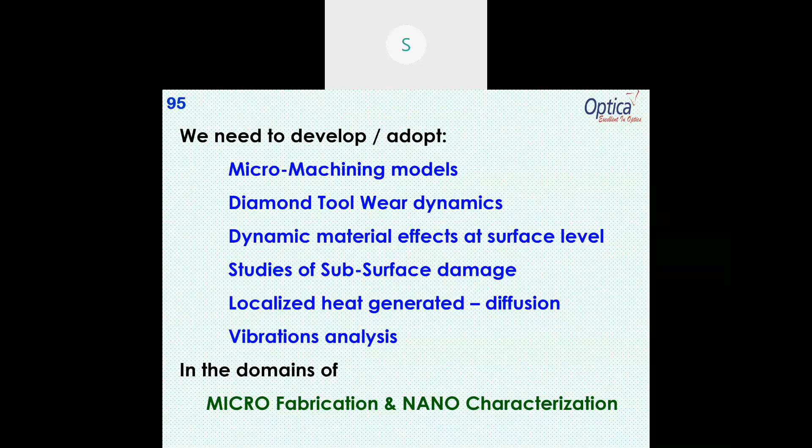So I can sum up that the future of aspheric optics in this country as well as abroad, in the world, is very exciting, very challenging, and amply rewarding. You get so much satisfaction by making an aspheric surface, by following all those things that you explore along the way. So friends, I think we are nearing the conclusion.

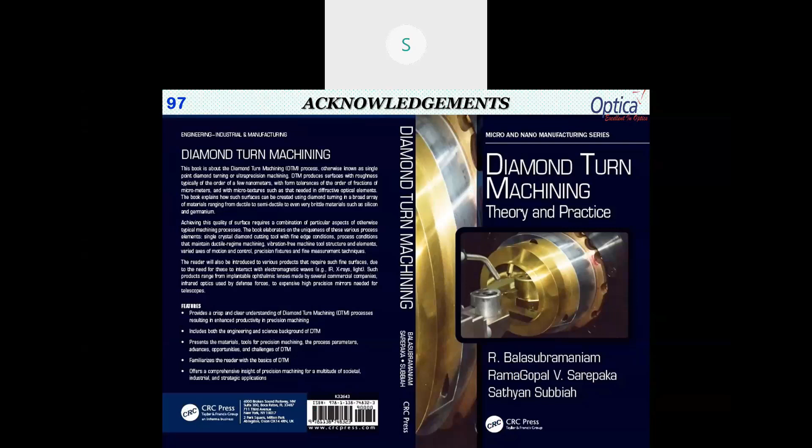Please allow me to thank everybody who contributed to the little bit of knowledge I was trying to share with you. My students primarily - all my students are actually my teachers. And then my colleagues who worked with me, those still at CSIO and those who retired. And then my teachers who taught me the fundamentals of optics. And all government agencies which gave a lot of money to play with. And all organizations with whom I interacted, whether I benefited or got frustrated, whatever it is. Vendors who provided equipment and tools, and the clients who gave us the projects. Most importantly, the community, the optics community at CSIO as well as outside. So thank you all for the wonderful time that everybody gave me during this journey.

This is a textbook that I could write in collaboration with two very good friends - Dr. R. Balasubramaniam, from the Precision Engineering section of Bhabha Atomic Research Center, and Professor Sathyan Subbiah, a faculty at IIT Madras. I was fortunate to interact with these two gentlemen, particularly Dr. Balasubramaniam, with whom I've been working on different projects still. He was kind enough to give me the opportunity to write a book along with him, and it was published by CRC Press.

The next three slides list the publications we did at CSIO during my tenure - you can go through them faster now. After I superannuated from CSIO, I also got the opportunity to publish maybe 20-30 odd papers in the last 5 years.

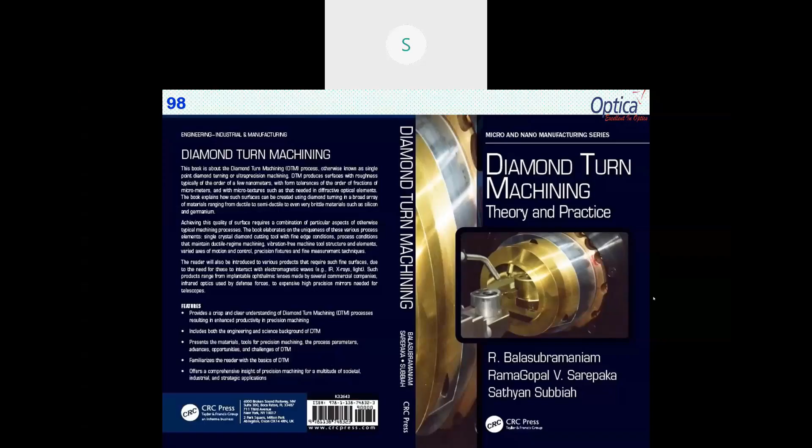Sir, I'm not able to listen to you. Actually my voice is breaking. Sorry, you are breaking, sir. In one of your slides, it was showed about... sorry, I couldn't hear, slide number 38. Okay, 38, let me see what is there.

There is an increase in the lower coefficient of friction. I have a doubt about the lower coefficient of friction in slide 38. Slide 38 corresponds to the fabrication we are talking about, regarding the coefficient. This is about the tool we are discussing here. The doubt is, generally...

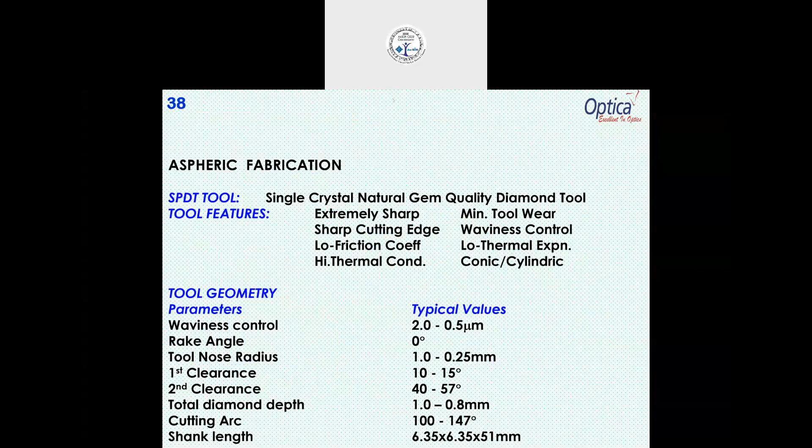Your voice is breaking, I'm sorry. You can talk a little slow. Manjunath, please write in the chat box, your voice is breaking. That would be better. Maybe it's an internet problem, please speak slowly.

Okay, slide 38. Am I audible now? Yes, you are audible, go ahead.

Actually, the thing is, if you increase the friction, what about the uncut chip thickness? Whether it will decrease or whether it will increase?

It depends on the other parameters also, because you know, what is the spindle speed, and how your coolant is being placed, it depends on these other parameters.

So the doubt is, when the friction coefficient increases, as shown in one of the references, it was shown that when the friction coefficient increases, the heat takeaway where the chip is, is reduced.

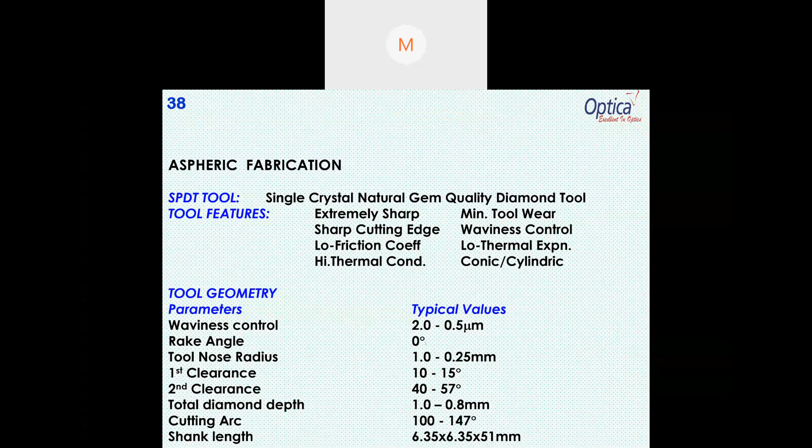Because I have not done any study on friction. Small feed rate means your chip dimensions are also very less, so the cutting radius is less. I mean, since I did not do any work on friction, I cannot claim something I did not study. Okay sir, thank you sir.

Welcome, anyway good question. If time permits, I'll go through this at leisure.